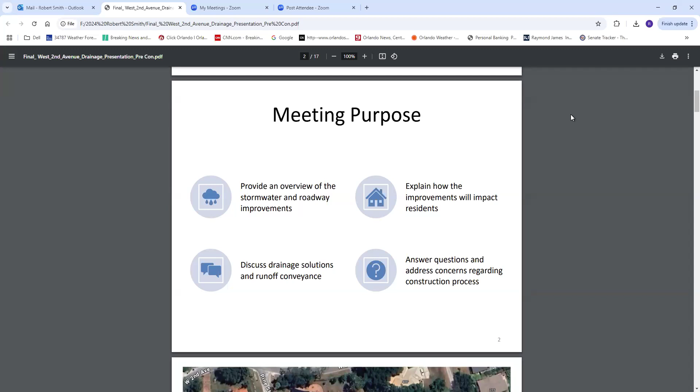Thanks, Robert. Appreciate it. If you could go to the next slide. Obviously one of the most important things for us is having a project laydown yard that has the proper accessibility and a place for the materials for the project to come in with ease of distribution. The site at Palmer Park for the projected laydown area right now with Cathcart is centrally located to the project, giving us great accessibility to go both east and west from that location with the least amount of impact to the residents.

We will have a lot of material and those kinds of things being delivered. It's a very tight project, so we want to be able to have a place where we can lay it down and only bring in the material that we need for that specific day. If you could go to the next slide, Robert. And John, we've used this area for other projects, correct?

We've actually used this location several times for other projects in the past. We used it for Pine Street, the First Avenue project, and a number of projects. So the laydown yard just seems, it's actually worked very, very well for us in the past.

At the end of the project, it will be completely restored by the contractor, so it appears that we haven't ever been there. We have fenced it off. Obviously, we want to provide protection for those people utilizing the park. So if you do a drive-by, you will see a fenced area that the contractor has cordoned off, if you will.

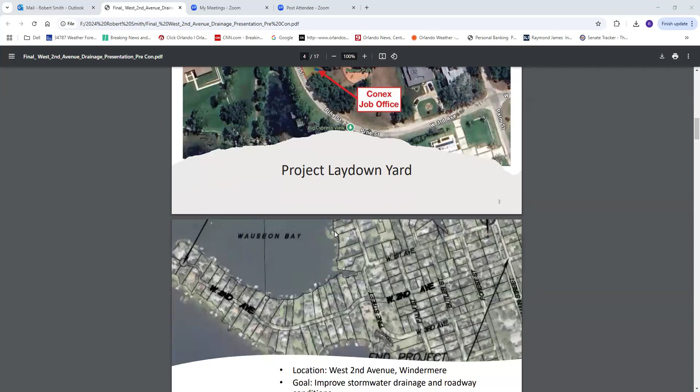So overall, the project basically goes from the end of the cul-de-sac all the way to Main Street. This is kind of the area. We are doing improvements that include water infrastructure, all of the stormwater improvements for low-lying areas, and major enhancements to the road itself, with being able to control runoff with gutters and all new pavement from the end of the cul-de-sac all the way to Main Street.

Tonight was really a night for us to talk to you all about our pre-construction before we get started, and really just allow you guys to understand the logistics of this. We've hired an unbelievable contractor I've worked with in the past. They're very user-friendly, they understand the nature of this business and this project, that it's very tight. So there's a couple things that I know, in talking to the residents over the last 2 to 3 years and actually walking the project, that there's probably 4 or 5 things that are important to you all, and I'd like to hit on those now.

Obviously, mail and mailboxes are very important. They may need to be relocated and adjusted temporarily. It's the intent of this project that when it's in the way of something, we will move it to another area so that you can still have all of your mail deliveries. Then when the project is over, they will place them in the proper location where they were at the beginning. We also have water connections and meter boxes that will now be fed to your houses.

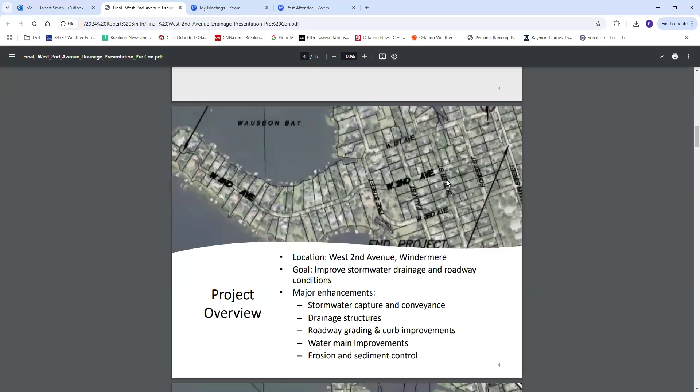In addition to that, you may have already seen survey stakes that have been placed. Those survey stakes are really just defining the right of way and the property lines, not necessarily the extent to which the project will be. Those stakes will come along a little bit later as we go through our individual phases, which Ryan will walk you through, so you guys can understand the limitations of where the impacts are through the construction process. I think that pretty much hits everything on any questions people may have relative to the impacts to you personally.

And then as Ryan goes through his phasing, you'll start to understand the timing of when we'll be in your area. And I'm sure there'll be some massaging and other things that we may do with each of the individual residents within the areas that might be impacted during that phase.

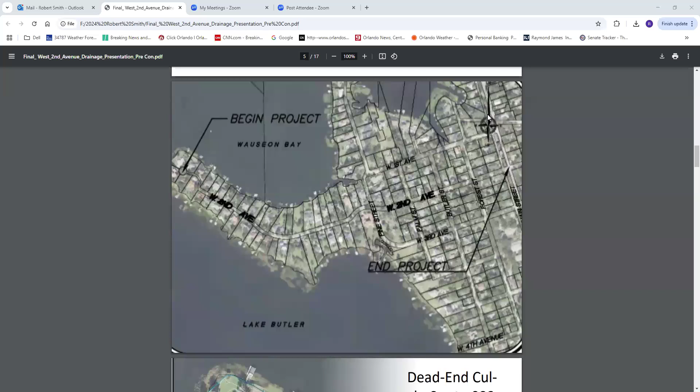So if you could scroll down. Thanks, John. I mean, when we go through some of these slides, you'll see a lot of yellow and red. Those are the basins that we're looking at trying to relieve some of the flooding in the areas. We can get into some of the technical questions if you'd like.

But most of the time when there's a construction project, especially one that's been going on for 5 years, we'll be more than happy to go through any technical questions. But the main purpose of this project is to take care of the stormwater, add potable water, and then mill and resurface the roadway, and add curb and gutter to those.

But it's going to be a Miami curb, John? Yeah, it'll be a slight V curb. Depending on where we are, it kind of changes a little bit, but for the most part it's a V curb. So you're looking at about 2 feet on each side. So right now two cars can't pass each other, but with this project they will be able to. It's not a two-lane roadway, but if there's a landscaping truck, you'll be able to pass it.

If you're familiar with the Pine and West Second Avenue project, that's pretty much what it's going to look like at the end of the project. Or when you get down to Andrew McCarthy's property as well, that's exactly what it's going to look like once completed.

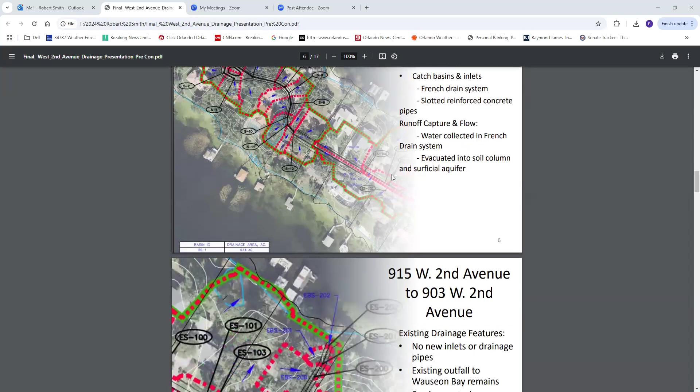Does anybody want us to go through the actual specifics of the design or technical questions? No.

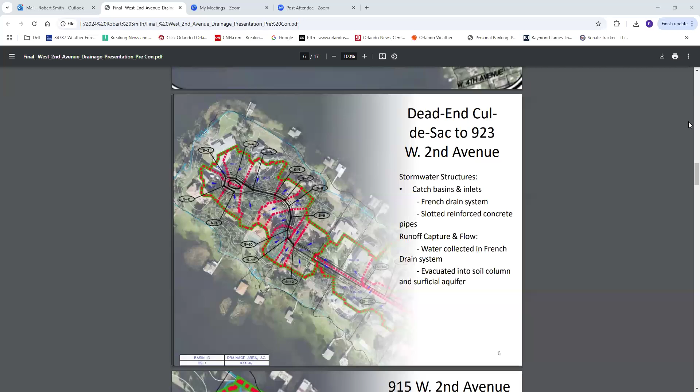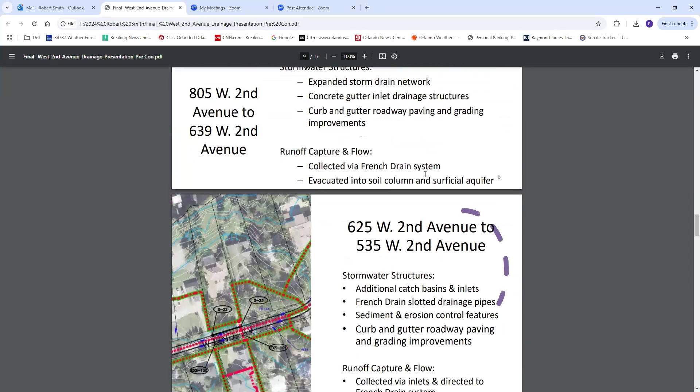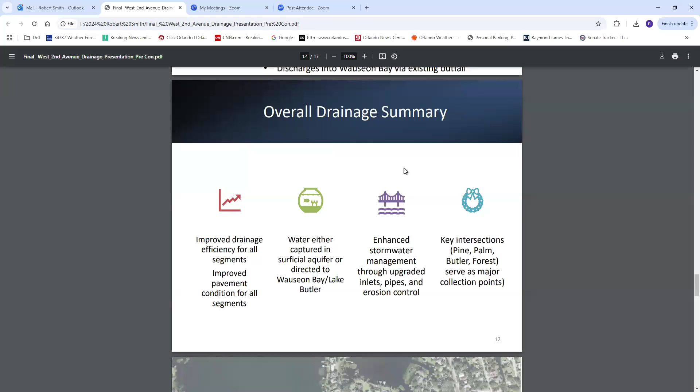Did you say there was somebody else who's going to present something? Because you answered a couple of questions, but I just had a couple and I don't want to hold everybody up. They're not big questions. Yeah, I think for us we've included it in the package, so if you guys wanted to go back, it's located on the town's website. If you want to look at your specific area just to see - it's really just going back to remember what we talked about a couple of years ago. I know, it seems like forever, so nothing has changed from what we've talked about, it's just coming to reality. So we just wanted to include that in the package for your reference more than anything.

Okay, you pretty much answered my whole mailbox question, so I'm good with that. The other thing is, as far as sprinklers - I have sprinklers that look like they're in the right of way, so how will that be handled?

Mitchell has put sprinklers in the town's property. No, they were here when we moved in. We've been here for 23 years. So typically what we do - but you make it look pretty with those sprinklers. I know, and you do amazing. I think it's important. Yeah, so that's a great question.

Typically what we will do, and I can let Ryan expound on this a little bit, is one thing we'll ask you guys to do as we are coming through and you're starting to see the phasing plan - it's very helpful for us if you or your landscapers could tag and locate where your sprinkler heads are. And then as we come through, if they are damaged or cut, typically what we'll do is cap it, so that as you're watering the rest of your yard you're not bleeding out into the project or into the right of way.

After the fact, prior to our restoration, we just ask that you get your guys back and irrigate it the way that you want it irrigated. So do we have to pay for that? In most instances, no. If it's a small break or a small issue, we'll probably repair that.

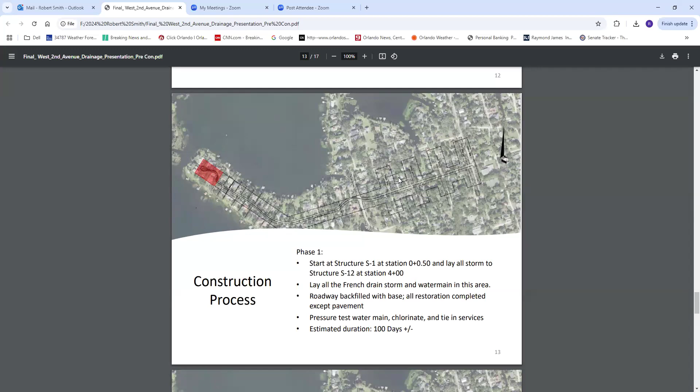Phase 2, which is obviously the largest portion, we plan on starting as soon as restoration is done in phase 1. This one is going to have two crews on it doing the storm and water work concurrently as well. If it becomes an issue with landscaping and we have to get to a middle point, stop, and go back to begin restoration in some areas, we can. But our game plan is to put everything in red in, then drop back, do a full restoration, and get everything back the way it was before continuing to the next phase.

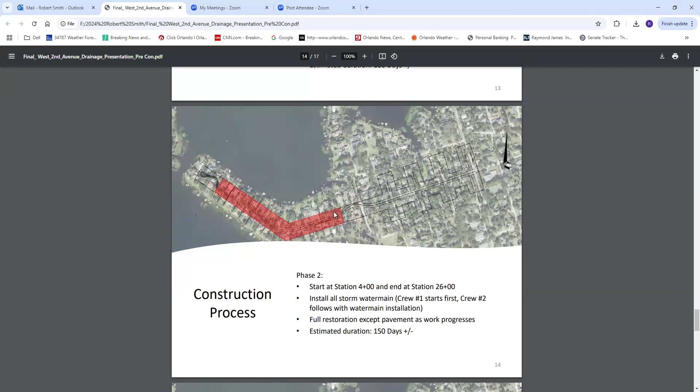The only part of this project that won't be fully completed when we leave phase 1 into phase 2 is the asphalt. We will have it up to final grade with a drivable surface across it, but as of right now, it's all going to be paved back at one time.

The final phase is phase 3, which is a lot of the tie-in portions. This one doesn't necessarily have as much impact going down the road end to end, it's more at the intersections. It'll be the same water line reconstruction and storm drainage being installed, and same as the last, we're going to go concurrently. Most of this area is a dirt road as it is, so it'll be a better drivable surface before we do the final pavement.

The reason we did that is that resident has very nice landscaping and fencing we don't want to disturb, and we don't have to put any utilities in there. So we're better off just leaving it alone, and we'll transfer the traffic over.

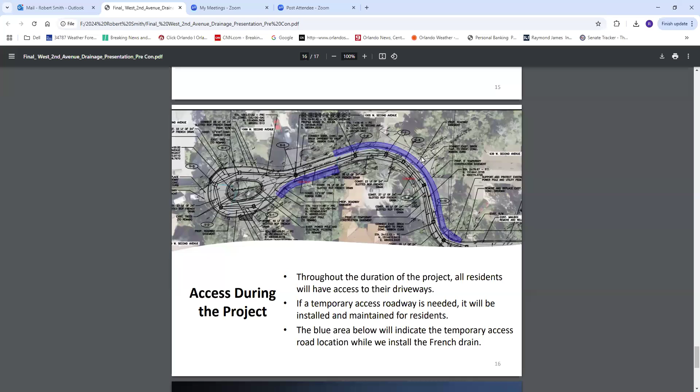Yes, sir. Sorry, I'm on my wife's cell phone in the hospital, so I apologize for the delay. I had a couple quick questions relating to my side. I thought this meeting would focus more on the east side of West 2nd, but I'm requesting the engineering drawings for 2nd Avenue from Main Street to Pine Street.

If you guys could direct me to those, and even to the specific pages, because I've looked at a bunch of drainage documents before and they're very hard to figure out which ones of this entire project would relate to my case.

Also the drainage calculations for this basin, particularly, you guys know me, you know this situation, and I'm going to be following this closely to see how it affects tying into the Forest Street project. We've had several questions about how or if this will tie into Forest Street, and up to this point even Mike Galera has been unable to tell us if the pipes are going to go from 2nd and connect into the Forest Street project.

Right, Jeff, sorry to interrupt. You're at the hospital, man. I'd be more than happy to set up a meeting just with us to go over your specific needs. I'm guessing you need to focus on something else right now. So if that's okay, it's completely up to you. If you want to ask your questions now, that's fine, but I hate to put you through this when you're at the hospital, sir.

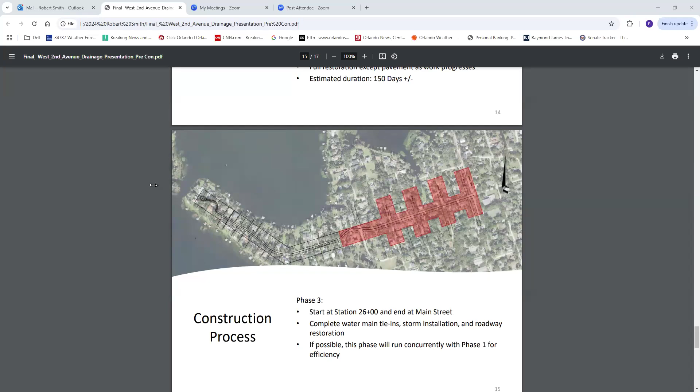Okay, is there any additional questions? There's one from iPhone 4: is this section of West Second tying into the system on Forest?

Will the water coming in there now be lessened or increased with this project? There will be no increase, it will remain the same, it's the same volume of water. We have not changed land use or the impervious area going into the system, so the volume will remain the same.

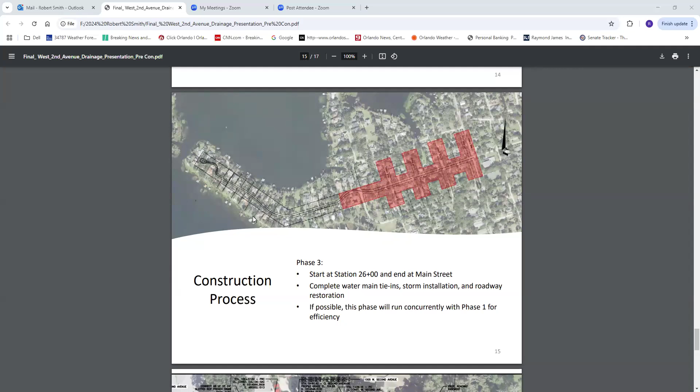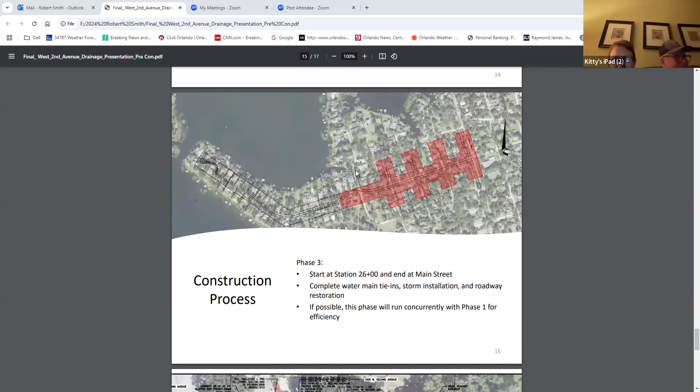Okay sorry, that was Kathy and Kitty. You good? Yeah, any more questions? Okay, thanks guys so much. Richard, we still need to do our lunch, bud. Yes sir, anytime. I'm just hanging around now, I don't work too much anymore, so if you need help I can help you. I appreciate it, Richard. Don't go falling, Richard. Good grief, no, we'll avoid that, we gotta be careful.